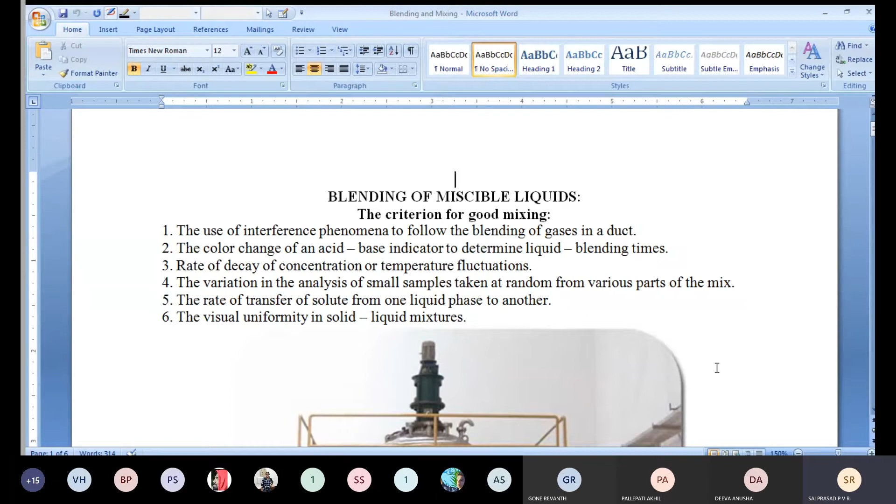What purpose is this used for? I will state a small reaction. Sodium plus methanol gives sodium methoxide and hydrogen gas - a simple reaction which you all know very well. Sodium plus methanol gives sodium methoxide plus hydrogen.

So now how to start this reaction? Close the bottom valve first. Through the manhole, check the cleanliness of the reactor - it is clean. Then first you admit the methanol. Some quantity of methanol which is supposed to be sent, you send it up to this level.

Then slowly add through the manhole, because you can add sodium by means of a dip let, or you can also add by means of a manhole. But care must be taken that this room should not have any air content, because if air is present and the operator is taking sodium, it will explode into pieces. His hand will also die into pieces, because sodium is highly reactive in nature.

So good practice is what? Sodium will be coming in the form of powder and falling into the diplet. So now you are sending it inside slowly. Because of the mixing, reaction takes place. Now suddenly you will stop the addition of sodium.

Then what will happen? You are stopping the addition of raw material, but you have methanol present. Methanol and sodium are present here, and they are reacting to form sodium methoxide. Now you take a sample and send it to QCD. QCD says the reaction is not completed. What is the meaning of this?

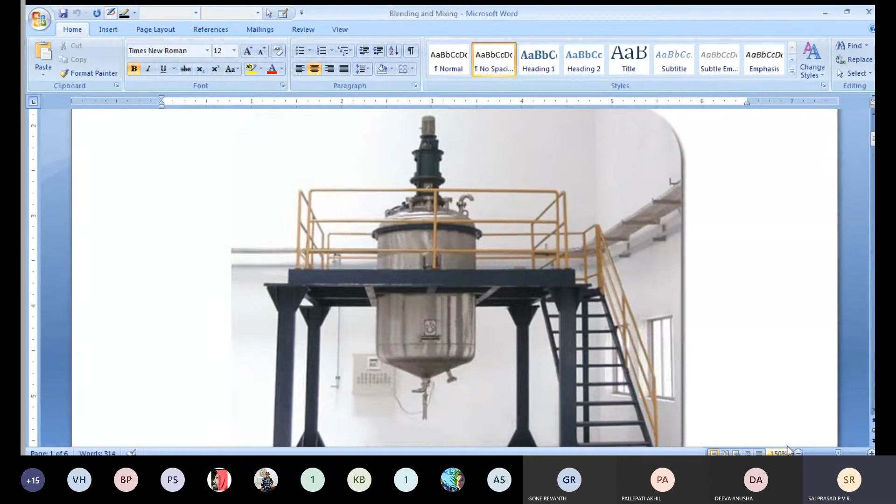And when you start it, the impeller will be rotating, and majority of the time the impeller is rotating, nothing is happening to the system. So these kinds of models will not work for mixing of gases. Hence what we should do is have a separate design for that - we will see this in later stages of the class. So here the first step is what?

When you want to mix sulfur dioxide and air, first you conduct an experiment. Remember, this first point is done only in R&D departments, not in conventional commercial chemical industries. So what you do is pump sulfur dioxide first through a duct, keep a sodium vapor lamp, and on the other side keep some indicator which studies the wave pattern - it can be photographic plates or counter devices, anything. Your aim is to observe the wave patterns, note it down, then stop it, send air, and note down the wave patterns.

Now you conduct an experiment. What is that experiment? You send 99% air, 1% sulfur dioxide, and study the wave patterns - first 3 experiments over. Fourth experiment, sulfur dioxide 2%, air 98%. Like that you increase sulfur dioxide up to 99%, air 1%. So note down how many reactions you conducted. Now you read the pattern.

Now what do you do, sir? A sample will come from the production block asking whether the mixing is complete or not. You bring it, blow through this, take the same signal, and study the wave pattern. If this wave pattern matches with any of the percentages - because he will already give you the percentage - if it matches with the one in your hand, then we say mixing is complete. Otherwise, we don't say mixing is complete, and you tell him to go back and let the mixing continue. This type of work is done only in R&D, not usual in our chemical industries.

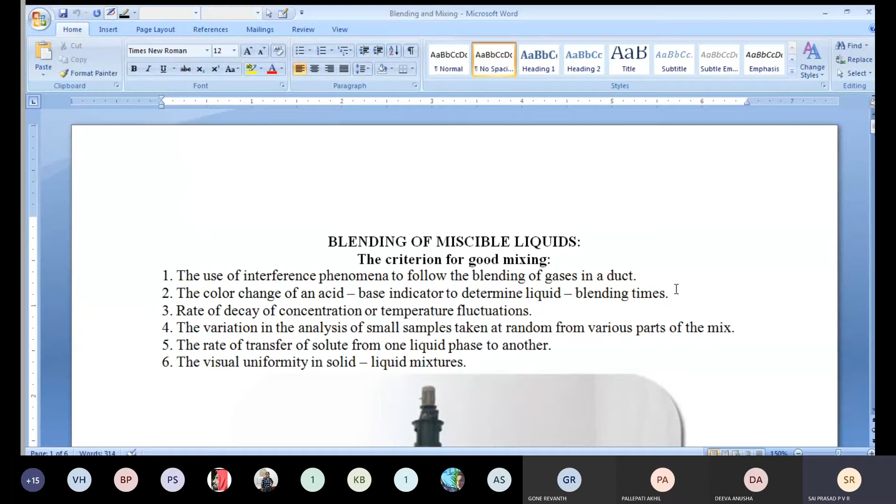So for that purpose, what do we do? Here I will show you one more diagram. Through the manhole we have a sight glass. Here we keep a light on, and the operator will be seeing through this. Light passes and falls into the container, so everything is visible to you. By observing the color, he will say the reaction is over.

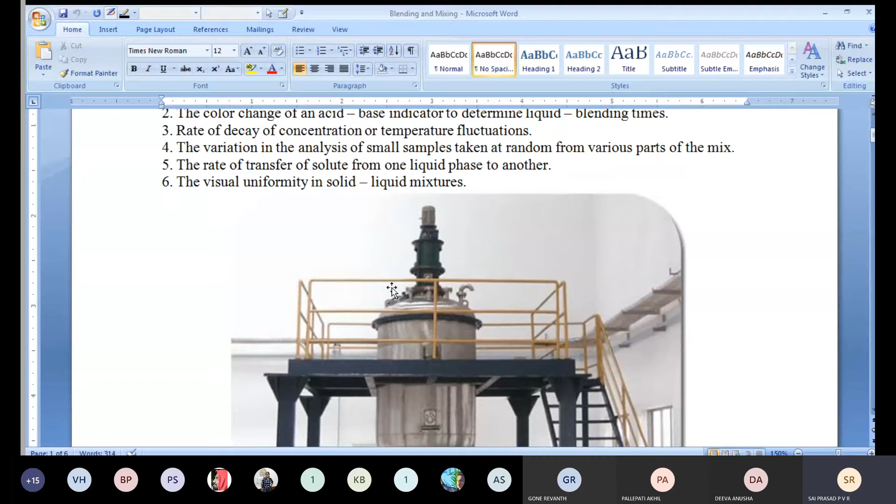This is one method. Second one: rate of decay of concentration or temperature fluctuations - a beautiful statement. You know very well that all tablets have an expiry date. Why do tablets have expiry dates? Because after the expiry date, the medicine will not work perfectly. It is because the original concentration, which decays with respect to time, after a certain time becomes below the half or something else, then we stop the usage of the tablet.

Similarly, in your chemistry lab, the teacher or storekeeper will prepare fresh solutions. He will not keep solutions prepared last year or the year before. Before you go to the chemistry lab, fresh solutions are prepared so the concentration is very vigorous, and then you use it - the purpose is solved. So how do we understand this decay in concentration? For example, let us understand a small reaction: A plus B gives products.

A plus B gives products. What is A? A is a raw material. What is B? B is also a raw material.

During the reaction, the concentration of reacting species decreases with respect to time. If you plot a graph between concentration and time, the curve will have a sloping bottom. Initially concentration is high, but after time T1, T2, T3, T4, T5 seconds, it decreases, and in some reactions it may become zero, or the line becomes parallel to the x-axis. This indicates that beyond that point the reaction will not take place, and we have to approach thermodynamics to find other conditions which can change the conversion to 100%.

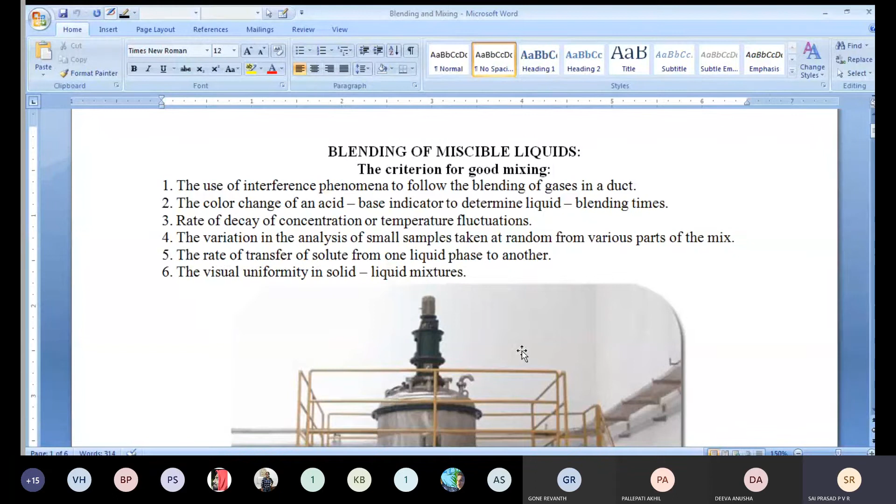Mixing is perfect, and now we have made a product, and the product has to move to the second unit or go to market, whatever. So these are called the criteria for good mixing.

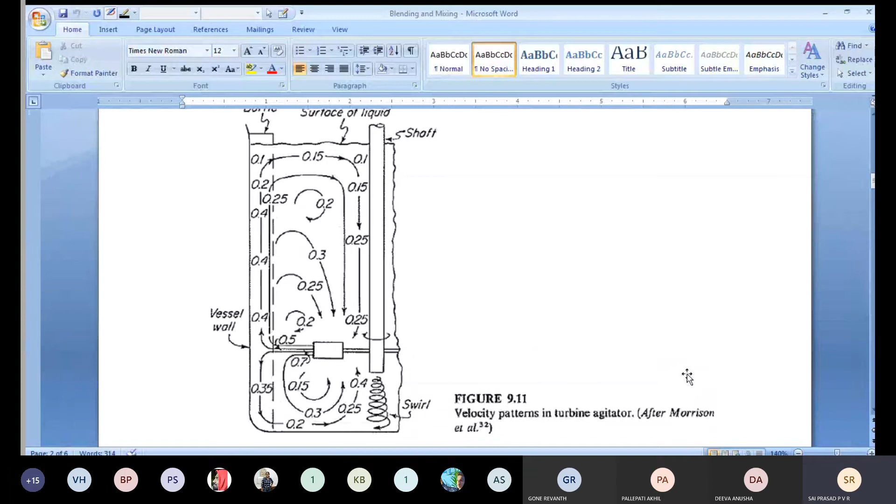So only the half part, see I have cut a reactor half suddenly. And then I wanted to find how the flow currents are going, because for me the next topic is very important. So again I am repeating this flow pattern in agitation vessels. This pictorially tells us how the currents will be generated and how the currents will be moving, everything we can see.

Okay, now let us see one by one in detail. This is a sectional view. In our engineering drawing, it's called a sectional view. Hope you studied engineering drawing. I have cut the reactor into two parts, half.

So hence I have a shaft. This is the other side where the impeller is gone. So this is our impeller, and this is the baffle, and this is the surface of the liquid. And now this agitator is rotating like this. So when it is rotating like this, what will happen, sir?

First, if you see, the currents are going from here. This 0.7 and 0.5 are nothing but the velocity terms, the velocity values of the flow currents. So 0.7 to 0.5, that means the stream is moving at this velocity, whatever it is, no problem. That gives the magnitude value of that particular flow current.

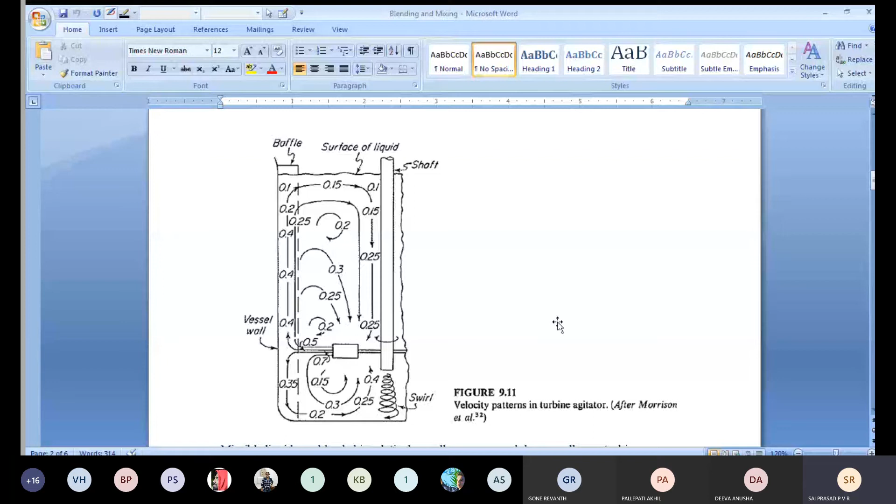I said that this photograph is taken after starting the agitator, after establishing all the flow currents. So this is how the flow currents are established in an agitation vessel.

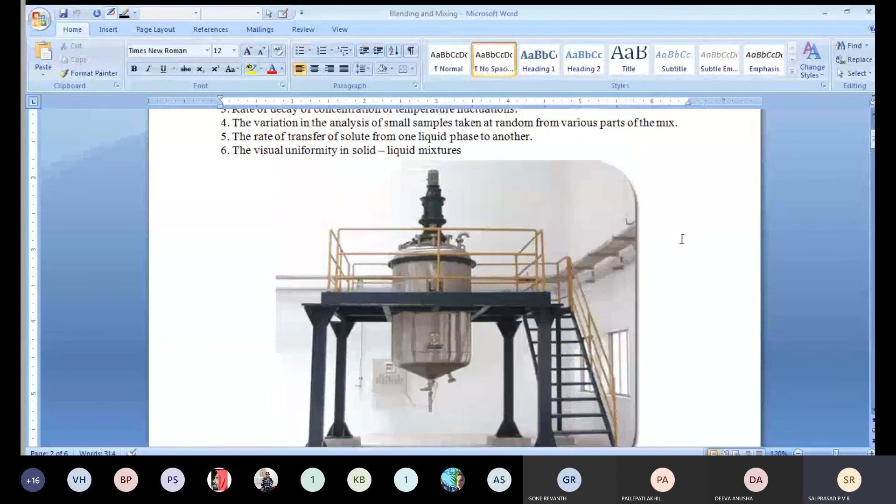Then, what are we seeing exactly? We are seeing a term called blending of miscible liquids. Blending—I told you, what is a miscible liquid? Ethyl alcohol and water are miscible liquids.

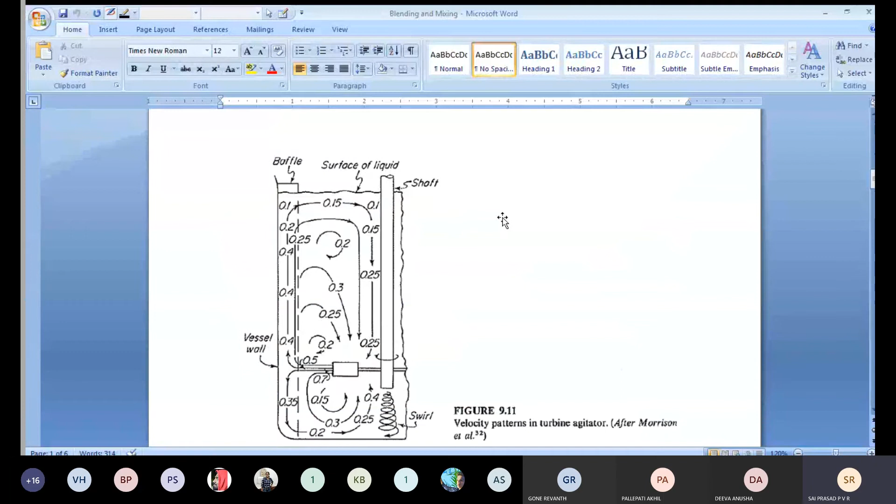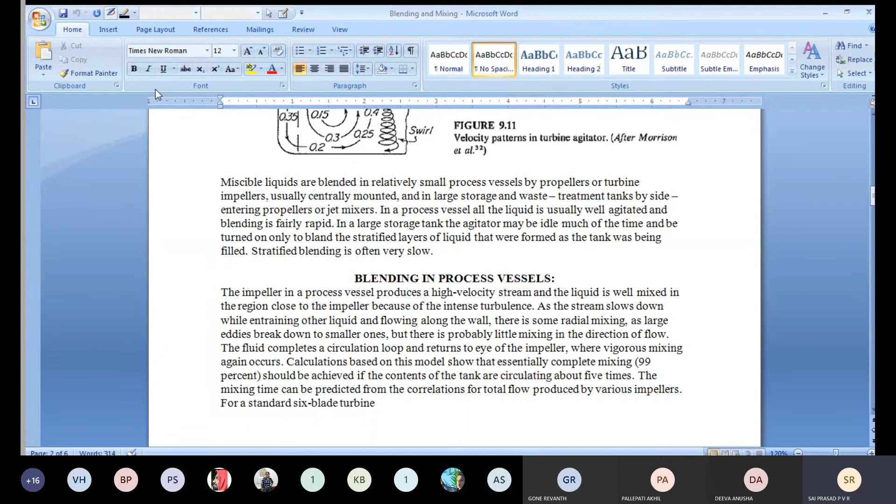Miscible liquids are blended in relatively small process vessels by propellers or turbines, with impellers usually centrally mounted. In large storage vessels, storage or waste treatment tanks, we use side entering propellers or jet mixers. Now I will show you some diagrams where the tank sizes are very big.

See, a human being will come up to this point only, not beyond that. See, this is a big one. So if you keep an agitator here, this much amount of the tank, and if you start the agitation system, how much time will it take for this movement to be observed at the top of the reactor? And what is the power consumption? Do we have that much power?

Will the management give permission to use a big power-consuming electrical motor which consumes huge amounts of electricity? So in that case, what should I do? I should use side entering propellers, as we have read here. I will show that to you once again.

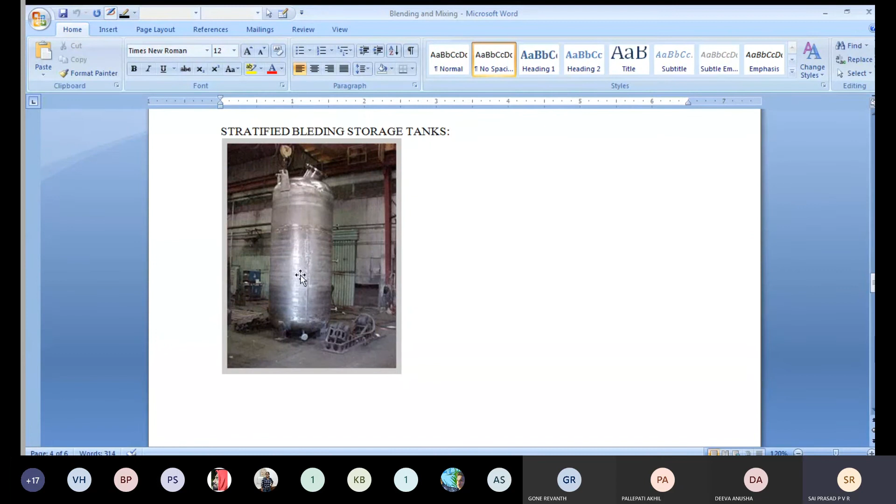Here we have a large process vessel where we have to store liquids in large tanks. One example: when we go to a sugar factory, which is a place where we produce sugar.

Generally sugar is produced from sugar cane, and sugar cane is not a continuous crop—it's a discontinuous or seasonal crop. So once we have a crop of sugar cane, we go for harvesting, and then the sugar cane is brought to the sugar factory. Like if you go to Gayatri Sugars, you will see this: in bullock carts or tractors, farmers bring heaps and heaps of sugar cane and sell it to the sugar factory, then go away.

Now what we do here is crush the sugar cane, extract the juice, and with the juice we make sugar. Once sugar is made, the remaining part of the liquid is called molasses.

Molasses is the starting raw material for ethyl alcohol by fermentation. But molasses has to be diluted in a 1:10 ratio. Only then can we grow microorganisms and allow fermentation to take place. But since sugarcane is not a continuous crop, from time to time we are supposed to store the molasses.

So in a sugar factory, the molasses storage tanks are very big and large—tanks where you could automatically dip a 5-story apartment inside, that's how huge they are. So if you go and see sugar factories, you'll see molasses stored in large process vessels.

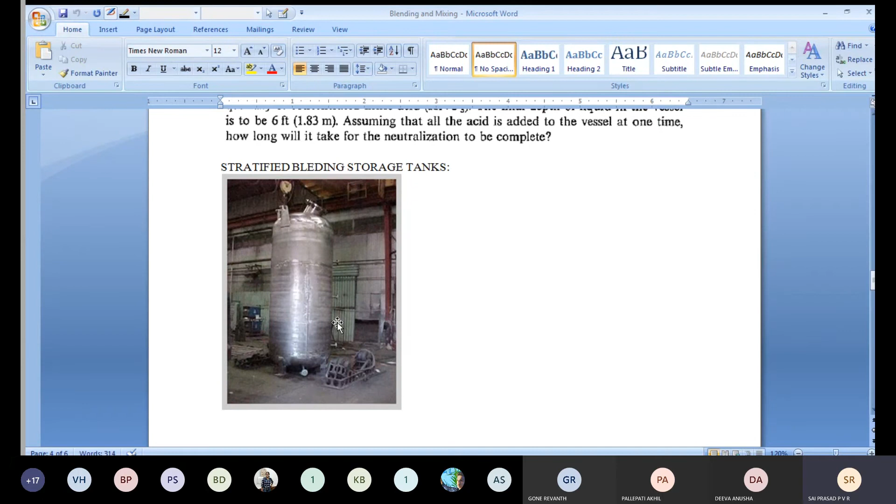In large process vessels, it is virtually impossible for us to have an agitator and create the kind of flow currents we've seen in previous classes. So what should we do? That is a problem for us. Let us crack the problem within a short span of time.

One more diagram—see, such a big one. Here, someone mixing may come maximum up to this level, but liquid is there from top to bottom. So how do we mix it? How do we start mixing? No, it's not possible. Difficult, very difficult—we have to find a solution for it.

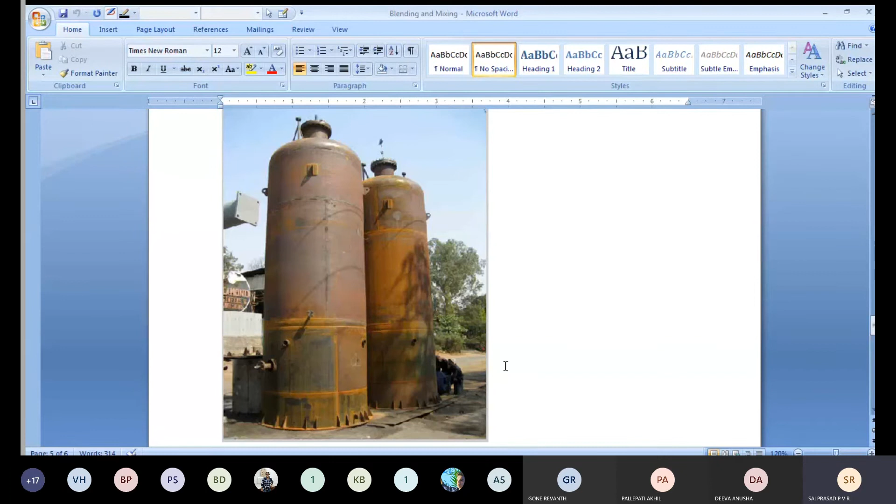Now this is exclusively for wastewater treatment plants. When you go to Amberpet, where we have a wastewater recycling unit, or for example the Jeedimetla Common Effluent Treatment Plant, you see big storage vessels with electrical motors, baffles, and different types of agitators. You've already seen that on a single shaft we can have a number of impellers mounted, because of this large process vessel—here 2 are there.

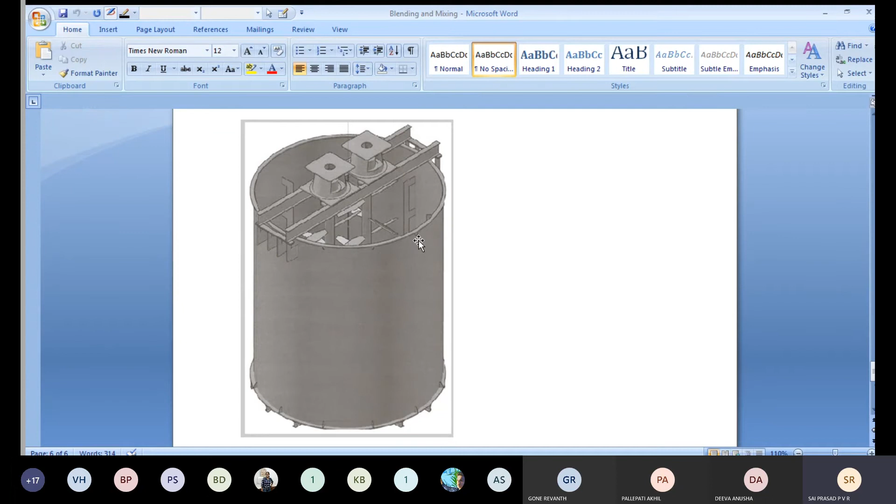So when we can afford this kind of system we can go for it, or else we can go for a procedure which reduces the cost of the process. That is important—we have to design our process so that the cost decreases. So for that purpose, what we should do is a very important thing which we will learn in a few minutes.

Now again come back to the statement which we have seen here. Miscible liquids are blended in relatively small process vessels. Like say for example, this is a small process vessel, this is a 5 kL reactor. We can use the small process vessel for mixing of materials provided the volume is below 5 kL, which stands for 5,000 liters.

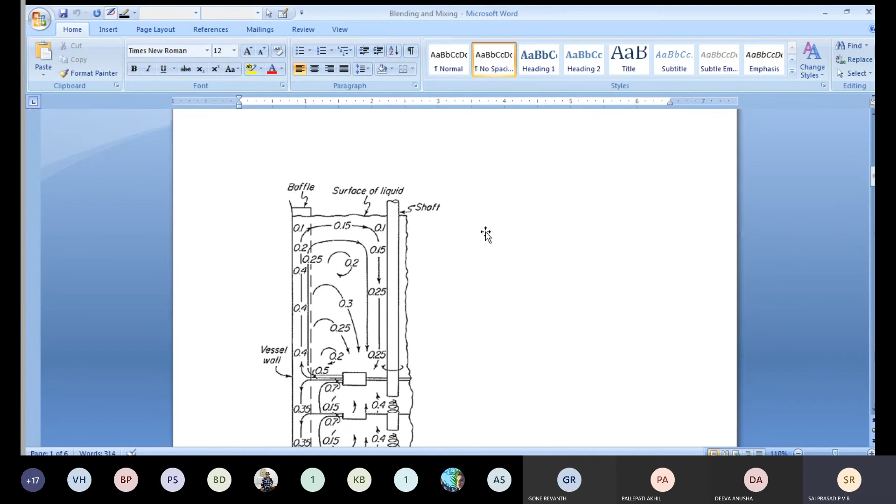By the propeller or the turbine. So what is the propeller turbine? He is talking about this part. Propeller can be used for creating only axial currents. But if we have draft tubes, then we can maintain the fashion of currents and mixing can take place, or we are able to establish the perfect type of flow currents and mixing can be easy there.

Then turbine impeller, this is an example of a turbine impeller, usually centrally mounted. If you see this, this is centrally mounted. We have the other part here and this is centrally mounted. In a large process, large storage and waste treatment tanks, we use side entering propellers or jet mixers.

So this is a solution for it. In case of a large layer or large storage tank, there is a difficulty called stratified layers. What are stratified layers? Stratified layers are those layers which are formed inside the large process vessel in due course of time, in which on a molecular scale the specific gravity changes.

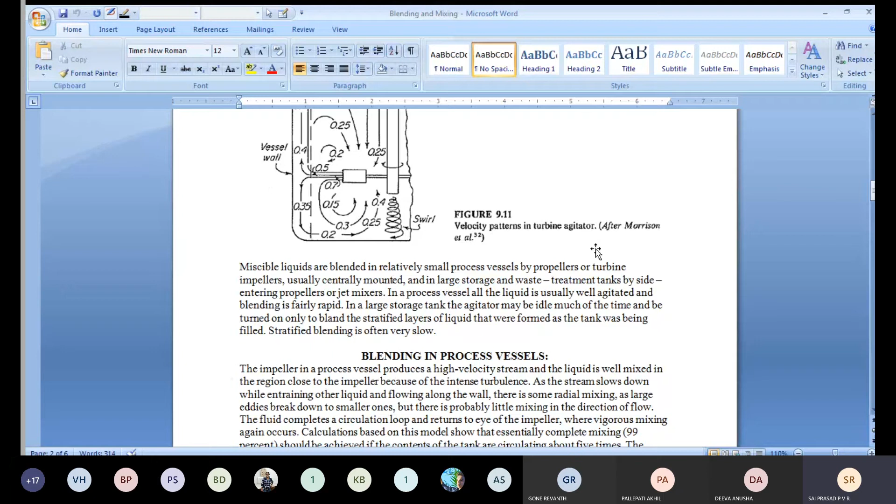Stratified layers are layers which are formed in due course of time. In one day it will not happen. You add some methanol in it, goes up to this point, or some water, some material closes. Then if you find after 2 or 3 days, there are stratified layers there. In this, the layers will be there.

They are not seen through the naked eye. What are stratified layers? On a molecular scale, there will be variations in the specific gravity because of the settling. And these are called stratified layers.

So here it is entire water, no problem. If you see as an individual, it is water. But because you are storing in a large process vessel, and after some time, in due course of 1 or 2 days, if it is having some solids, something else, molasses, etc., on a molecular scale, I said, means what? Molecular scales cannot be considered for macroscopic scale. For calculations, you take density the same, but only on a molecular scale, minute basis, the specific gravities will be different. But this will not be beyond the specific gravity of the methanol or the water, whatever material you are going to take.

So these layers, mixing will become very difficult. Hence what you do is, you try to insert a propeller like this, it will rotate, not centrally mounted. From here it will not rotate.

Or you go for jet mixing. Jet mixing, I will explain next class. So what we do generally in jet mixing is, we take out the fluid from the bottom, keep a compressor here, and this pipeline going out from the compressor enters n points of the vessel. You can make it enter at this point, second point, third point, go back from the top, at various angles you insert it. But the inlet is the same. You take the inlet from the bottom, send it to a reciprocating compressor, and from there you can give outlet to n number of connections.

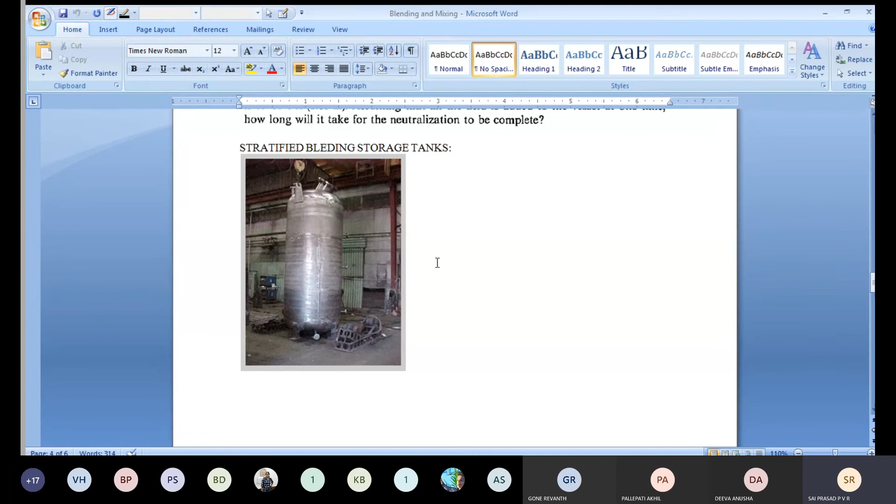So in your house, if you have an egg churner, what will happen? We introduce them at a different angle so that the mixing will take place uniformly, because when you mix eggs, they are having high viscosity, so it is a little bit difficult. So if you use this churner with different angles, your hand, you can mix them properly for the preparation of the cake or whatever it is.

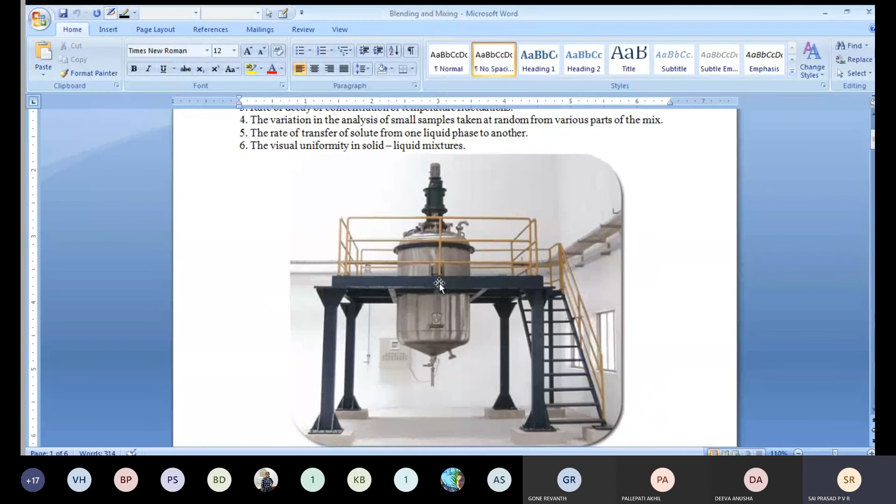In large storage and waste treatment tanks, side entering propellers or jet mixers are used. In the process vessel, all the liquid is usually well agitated and blended fairly rapidly. So in this vessel, whatever the system is there, flow currents are established, and the mixing takes place successfully.

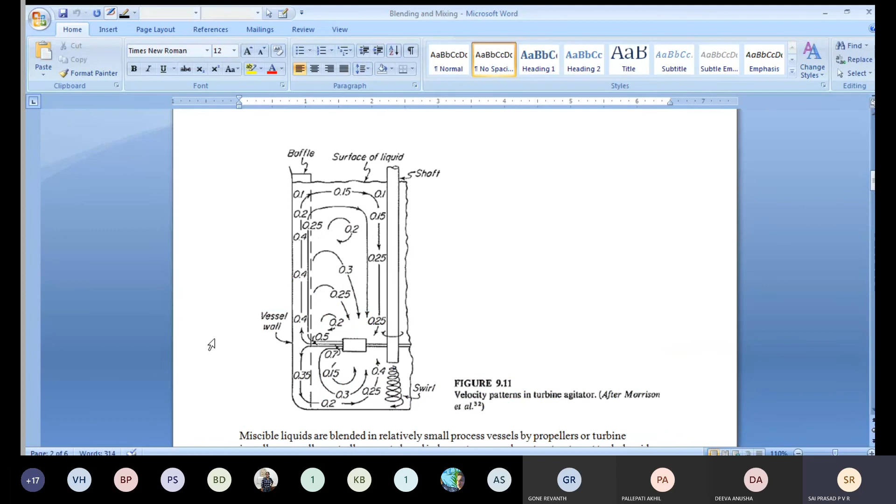In a large process tank, the agitator may be idle much of the time, turning on only to blend the stratified layers formed as the tank was being filled. If you keep only a single propeller or turbine agitator, it will take much time for the creation of flow currents, because the stratified layers' strength increases over time. Hence we require a lot of energy to break them and start our flow currents, which then have to come to the top before we know the agitator is functioning.

Unless we see from the top that the layer of liquid is disturbed or moving, we don't know if the action of the impeller is felt by the entire liquid. If not, you have to go for another motor, so it takes a lot of time. Initially, much of the time the impeller rotates only affecting the bottom of the liquid. Moreover, the impeller and electrical motor consume huge power, so this model may not work.

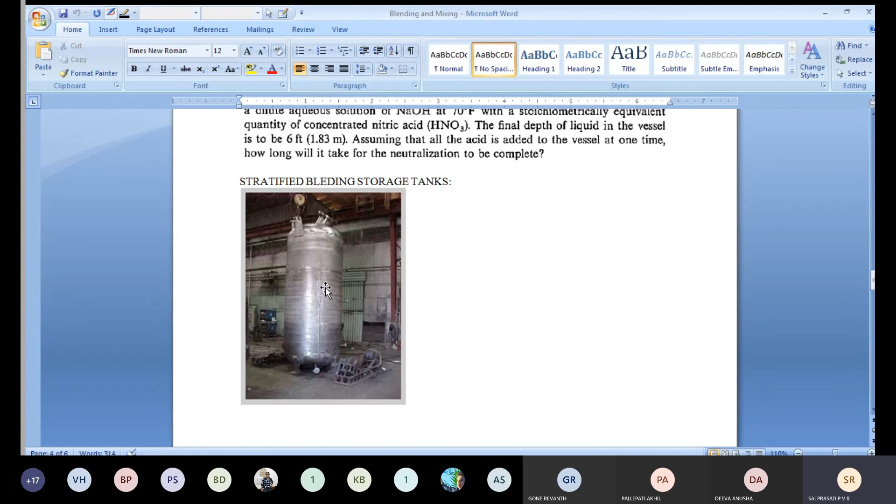So what you do is keep 3 or 4 models. If it is working, it is accepted. How do you say it is accepted? Only if you see from the top through the manhole that within a short span of time after starting the agitator, the disturbed layers are on the surface, that indicates the flow currents have formed and are coming to the surface. Now the mixing has started. This is the only conclusion we get. If not, go for another model like introducing side impellers or the jet mixer.

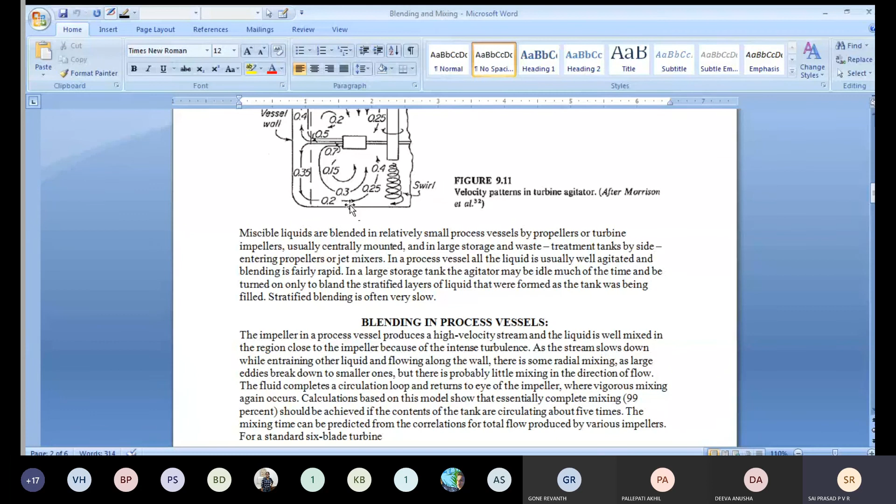Stratified blending is often very slow, as it takes a lot of time for the flow currents to come to the surface, because the tank is very big and layers have formed since we haven't used it for some days, 3 or 4 days, hence stratified layers are formed.

What are stratified layers? Once again, stratified layers are the imaginary layers formed in the liquid during the course of storage, where they can be differentiated only on the microscopic scale. There will be minor variations in specific gravities. That's the meaning of it.

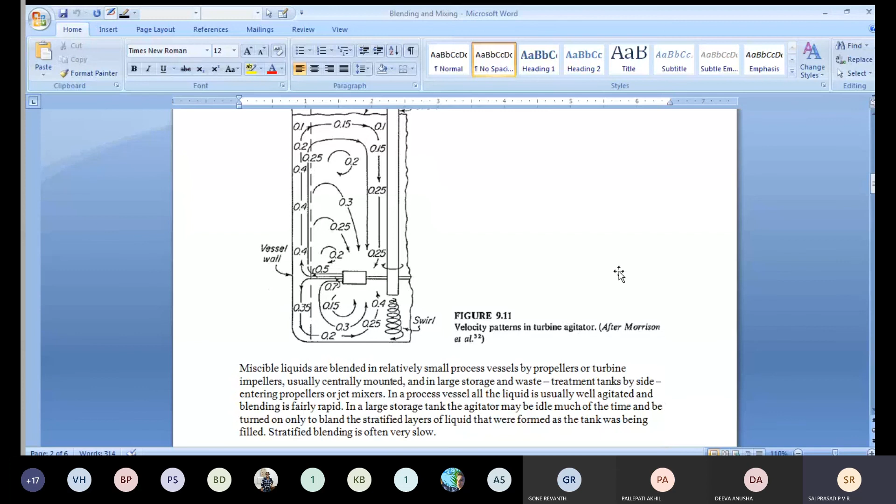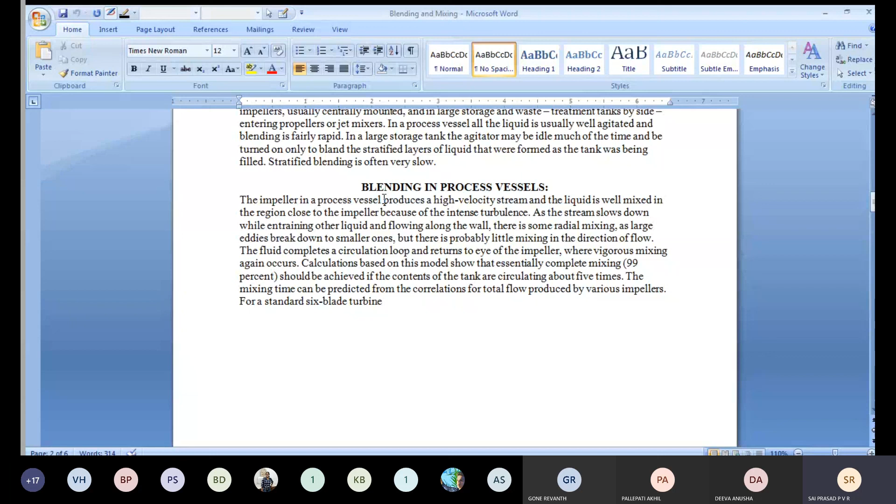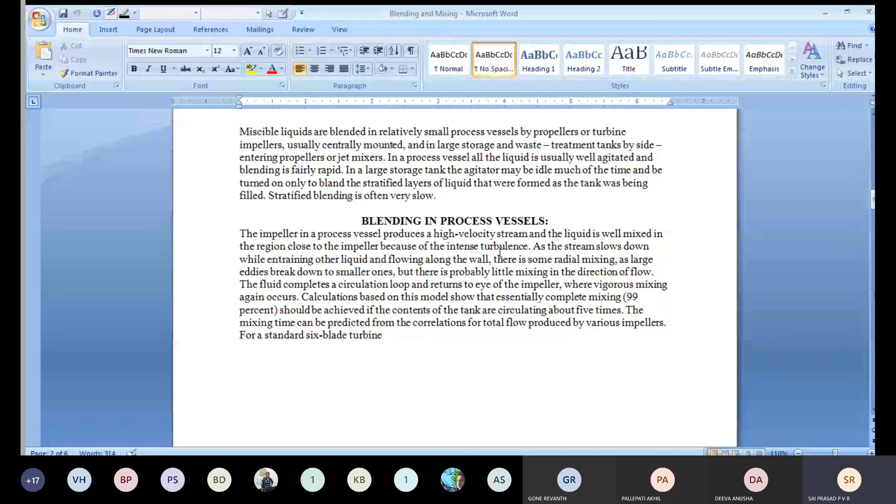Then, blending in process vessels: the impeller in the process vessel produces high velocity streams. What is the evidence for high velocity? These numericals, 0.5, 0.7, are high when compared to others. The liquid is well mixed in the region close to the impeller because of the intense turbulence. Since the turbulent impeller rotates at a specified RPM, it gives more energy to the liquid in the vicinity, so flow currents are more here, and hence we have a region of turbulence.